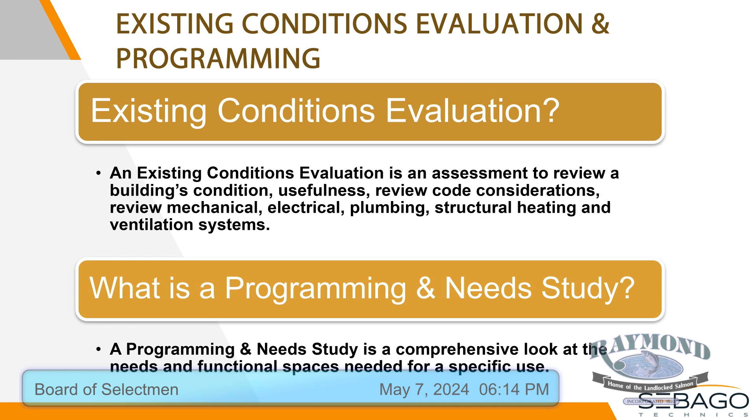Usually when we look at a public works building, we want to understand the condition of the existing facilities, if there's more than one, how they've been working, what operations they have. We also undertake a programming and needs study, that's where Mike Hays comes in, a comprehensive look at how public works functions and what the specific needs are. What we've found over the last several years looking at public works facilities is most are either spread out in different buildings or an older facility that hasn't kept pace with modern needs.

In some cases, I remember the South Portland facility, half of which was condemned, because public works tends to be the silent, unseen group that just takes care of snow and plowing and everything else, but they also tend to have some of the most expensive equipment. Sorry, Nathan, a new plow truck is $300,000 these days.

So we'll take a few minutes to go through where Nathan's facilities are distributed. One is located at 387 Webbs Mill Road, just down the street from us here. They have a portion of the building, about 4,200 square feet, with a footprint of about 3,900. There's a small mezzanine on the building. This location had a series of three additions over the years, in 1980, '82, and '89, correct?

I think I got that right. It's a masonry block building with a shingled roof. The parcel is about 7.8 acres, but it wraps up to Raymond Hill Road.

Years ago, we actually looked at a portion of that land on Raymond Hill Road for a town office location. So that's this site. When was that originally built?

The original building was built in 1980. The first addition was in 1982 for 2 bays, and then the latest addition was the other 2 bays in 1989.

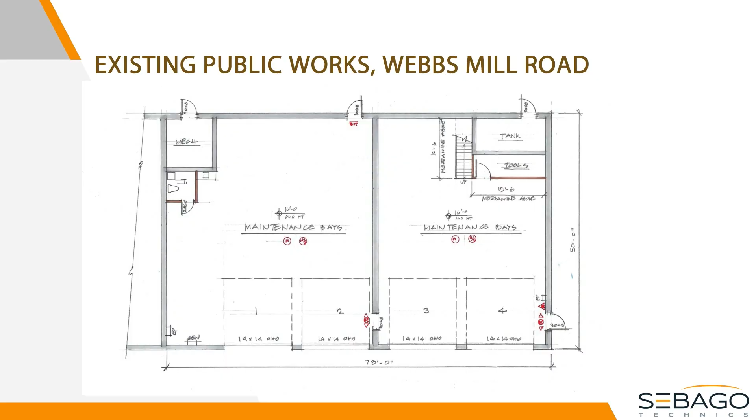This is just an as-built floor plan that Mike measured out in the facility. Pretty simple, basic layout with 1 bathroom, a mechanical room, and tank storage. I've got a few interior pictures here, and the next slide shows the interior.

Our mechanical, electrical, structural, plumbing engineer went through it. Mike went through it to look at it for a codes assessment. What I'll start by saying is the building is old enough that codes and design standards have changed over time.

The bathroom is not ADA compliant. The toilet's elevated and there's not enough turning space in it. There's no ventilation in the building per se, no air intake for supply air. The plumbing fixtures are all pretty well aged.

There is a good point that the domestic hot water heater's in good shape. You barely know, does that count, Nathan? We can keep that for you. We'll keep that as a memento.

Our structural engineer went through, and I think Sue had sent around the report, so I'm going to be careful when I say this. The building structure is in decent shape.

However, if you touch it, renovate it, modernize it, or expand on it, you'd have to bring it all up to current codes, which means basically that structure is probably not worth saving if you've got to bring it up to current codes.

My structural engineer loves to tell me the snow loads, the lateral loads, the earthquake loads, everything has progressed over time. Codes get better based on empirical information they collect over time. So this building just wouldn't sit with that.

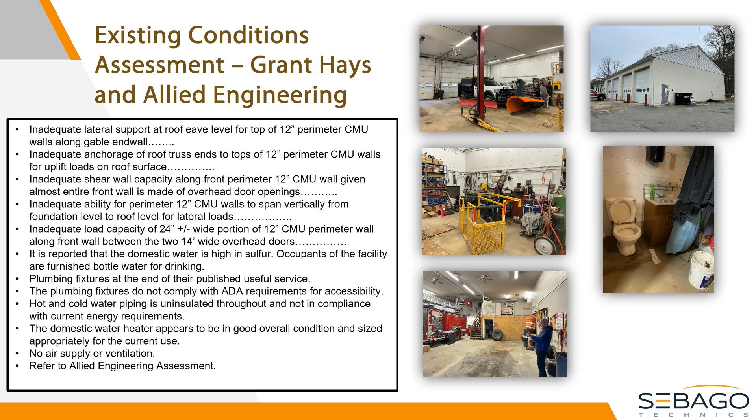The shingle roof is about 15 years old, but he did note, and I saw it too, there's a lot of fraying in the shingles, so I think they're pretty well at the end of their life expectancy.

The next location is off Plains Road. There are 2 buildings on that site already. One was a former sand and salt building that has been repurposed for cold storage and was reskinned. Great location for cold storage.

And then about 2015, we constructed a new sand and salt storage building. Those buildings have the laminated arch design, are in good shape, and are serving their needs.

Nathan acquired a portable trailer from the government in about 2018. For those who might remember when the military came in for about 2 years, they did what was called the IRT program, Innovative Readiness Training, and they did a bunch of work at Camp Hinds. Basically what happens is you provide the materials, they provide the labor and the equipment.

We got a tower out of it, right? Up there, which worked out great. And I still would not climb that thing. And I wouldn't go up in that lift.

And then they also refurbished a fire pond for us, and then down at the rescue building, they redid the detention pond, which needed to be renovated. So we got all that work, we just had to provide the materials out of it. It was a really good, valuable asset for the town.

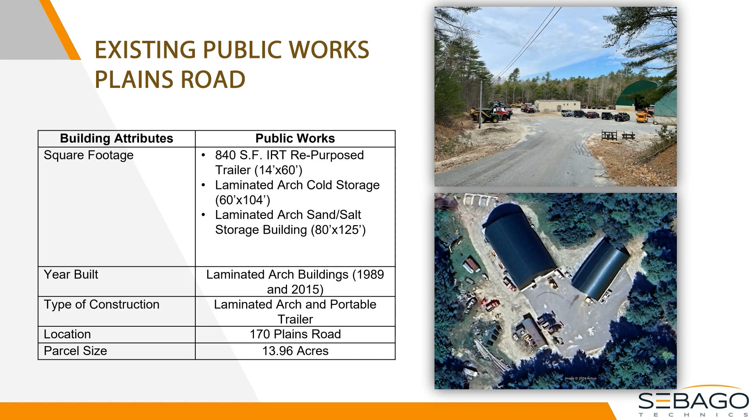Since they were here for that long, they brought in a couple of portable trailers for the rotation of the troops, the National Guard that came in and out. When they left, Nathan seized on an opportunity and obtained a portable trailer, which he moved to the site and has used as some basic crew space for his staff at the Plains Road site.

It does have heat, Nathan. Yes, good heat. And then we actually did have Allied go through it and Mike Hays go through it, as Mike indicated, just so we knew what we have. I'll be honest, this building was never intended to be anything permanent or long-term, but it's worked well as a stopgap measure for a while.

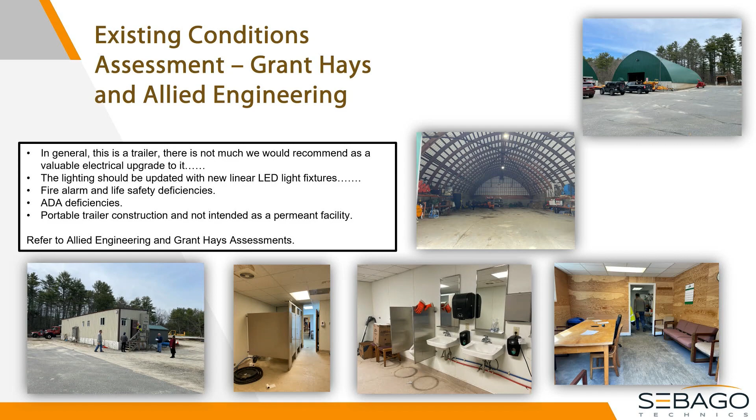The last of their facilities is really an old fire building. Dennis, you were in that probably at one point, right?

This is where I turn it over to Mike Hays, the architect. He's going to walk you through the programming and needs and talk about that, and then take you through some floor plans, building elevation, building styles. The building we're proposing is very fundamental and functional, very consistent with the other buildings we've been using in other communities. But Mike, I don't want to take your thunder. You keep telling me, I take it all away, so I'm going to give you a chance tonight.

Thanks, Owens. The first part of the process we embarked on is to determine what needs to go in a building and how big it is, what we call the programming and needs assessment. That's where we sit down with the folks who are going to utilize the building and find out what they need in it. So this particular programming assessment identifies 4 major areas of use.

The first one, at the top left, is the administrative functions, and those spaces include the Public Works Director's office, the administrative assistant, restroom, break room for the crew, custodial room, and locker rooms for both men and women that include bath facilities, plus some small amount of circulation to move about in those spaces. Through the sizing of those components, we came up with about 1,500 square feet of space needed to function efficiently and within code.

So if you want to go to the floor plan slide - I'm going to zoom in. I'm going to skip out of this and open up the PDF. Hopefully it'll be a little easier to read.

Can I ask you a question real quick while he's doing that? Sure. So what I'm hearing you say is, should they stay in the same building they currently have, any changes to it, because it changes the footprint, would all have to be brought up to date with everything, with the codes, everything. Should they hire a female mechanic, secretary, whatever, you have to have all that also brought into this too, correct? To be able to bring it up to standards and everything else. And right now it's not.

Right, let's pick on the trailer. Oh, exactly, exactly. Okay, totally ADA non-compliant. Yep, totally Universal Plumbing Code, MUBEC code non-compliant. And don't get me started on all the other pieces like the energy code and all those other things, because that trailer, if you were to try to touch it, that would be a problem.

Okay, and then - no, so saying all of this, and I know this is really pulling from left field on this one too - to bring everything up to make any kind of changes at all, especially roof, everything, what are you talking possibly money to do all this stuff? Because any changes at all to add on another bay, widen a bay, new bathroom, ADA, all of that, we're talking major money to bring stuff up to date, correct?

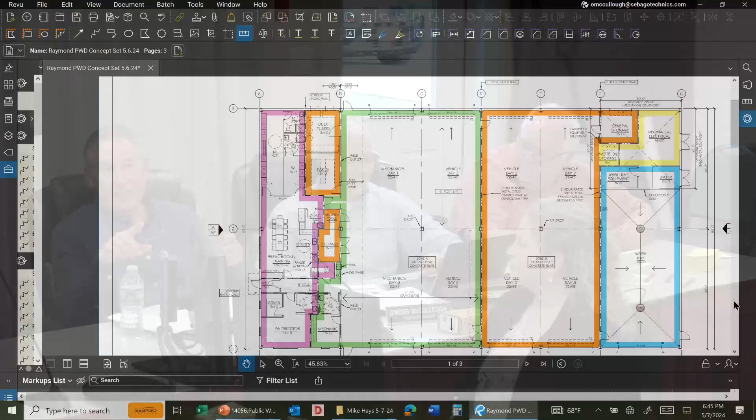And then we would have concrete up 4 feet off the floor, a kicker wall around the whole building. Some of the metal buildings you'll see out there run the structure all the way down and don't have the concrete wall. It doesn't work with where you've got vehicles and equipment moving around, so we have that wall on all of them. We'll wait for the elevations for that. The reason for that concrete kicker wall is because these guys plow right up to the edge of their building all the way around it, so if you've got metal, not a good idea.

Is there floor drains in the wash bay anyplace else, or just that? There are floor drains in the wash bay. There are trench drains in all of the work bays, and even in the staging bay there's trench drains. And then there are floor drains in any wet area, any of the restrooms, custodial, in the administrative area, and locker rooms.

So this is what we proposed the building would look like. I'm gonna grab a little water here. Can you talk about where it's going to be sited on the lot? I have a whole slide for that, Joe, coming up. Can't wait. I knew you could ask that. So, so if we look at the... So hurry up, we want to get to my stuff.

Okay, so if we look at the top elevation, this would be what would be considered the front side, facing the rest of the operations, and you'll see it on the site plan. The left-hand side is the administrative portion, which we've kept low because we don't need high bay there, to save some money. On the right are all the work bays that you see. You'll see that horizontal line about 4 feet off the bottom of the drawing—that's our kicker wall that goes all the way around the base. Above that are insulated metal panels for the walls and insulated metal panels for the roof. Over any opening, we have 2 rows of ice and snow guards to keep stuff from falling on people and vehicles.

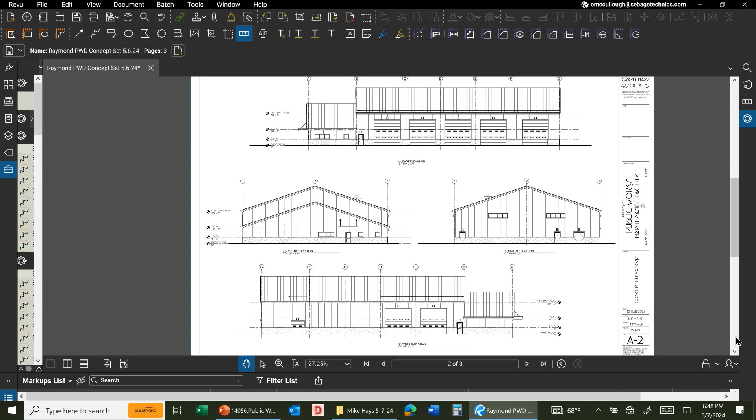The 2 middle elevations are the ends. The one on the left is the primary entrance, because you can see a little canopy over the door there. The one on the right is the wash bay end—we've got a couple of windows up there to dump some light into the wash bay. There's an egress door on the left, and doors on the right of the mechanical room and another egress door. The bottom drawing is what we would consider the back of the building, with the 2 drive-through bays shown there with the overhead doors. The people door to the right is that safety alley, that safety aisle. On the left, there's a small overhead door that goes into the general storage room, so if a pickup truck needs to move small stuff in and out, there's a small 8x8 overhead door for that.

In 3D, this is what it would look like, with this concrete bottom, gray metal panels for the walls, green for the roof, and the overhead doors are typically white by standard color. You can get other colors, but they cost more, so nobody wants them anyway—well, I shouldn't put it that way. There are certain people that like red doors, which we've done a lot of for fire stations.

Sorry, I got to get back to the PowerPoint. So that's the building. Yes. Yeah, where is the people? Can you please go to the mic? They can't hear you on TV.

John Fasella, Raymond Fire Department, 19 Loon Lodge Road, Raymond.

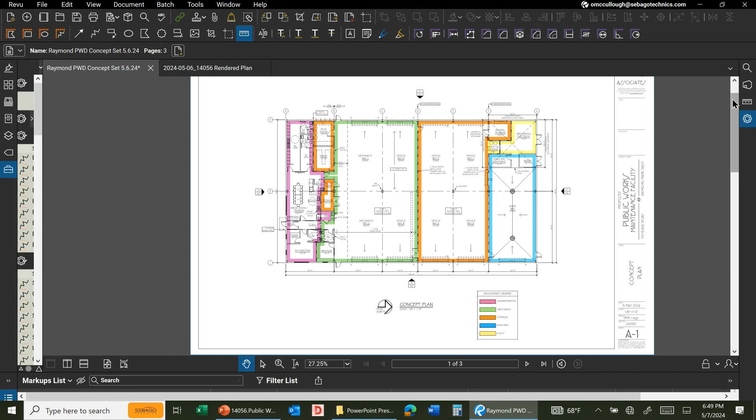Where is the people door on the rear of the building? I didn't quite get that. So if you go back to the floor plan and put the cursor on that, which particular one are you looking for, John? I'm just wondering how people would access the back of the building besides using a bay door.

On the left side we've got the two doors down there. And then on the right side, on the right end elevation, all the way to the end, there's one door there, and that door actually connects all the way through to the middle wall. So you've got a remote point of egress there, and another remote point of egress, with connectivity from the bays to the wash bay. And then you've also got the main entrance, which is the third point of egress. So we've basically got three points of egress out of the facility.

So from three sides, you can either access the building or people can egress from the building? Exactly. Okay, thank you.

Don't you have four egresses? Yeah, down there's at the bottom, one, two, three, one in the back - there is four. There is one down at the mechanic area. So the safety aisle has two egresses, and then you've got the main entrance and the wash bay. So you're right, you've got four.

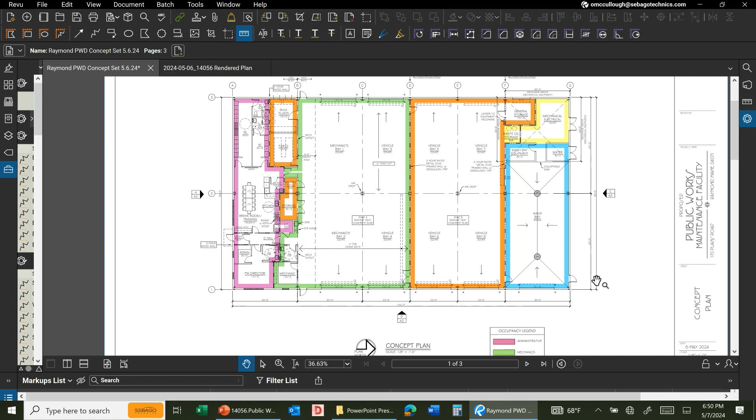Thank you. Yeah, thanks. All right, you're on.

One thing to note, when we put this out, the design will require that the roof structure be designed to accommodate solar. We're not proposing to install solar, but it's a real inexpensive lift to require the structure to accommodate it. And then the electrical would be required to have enough capacity in the panel to accommodate solar if we did that. How is this building facing?

I'll show you that, I already asked that. All right, you guys win. I'm going to the site plan. So here's the orientation of the building, so the sand and salt sheds here. If you ask it twice, they do - I gotta ask him twice to get an answer from him, right?

Thanks a lot. So you notice the trailer is going - well, that's because the trailer's where the building's going to be. So the trailer sits about right in here. This is the access down into the site, there's that loop road if you've been down inside of it. So basically where the trailer is is where we're going to place the building. We'll provide 360 access all the way around the building. There's about 35 feet, maybe it's 40 - we moved it a little bit. So we provided a pretty good space between the sand and salt shed and the building, providing access all the way around the building.

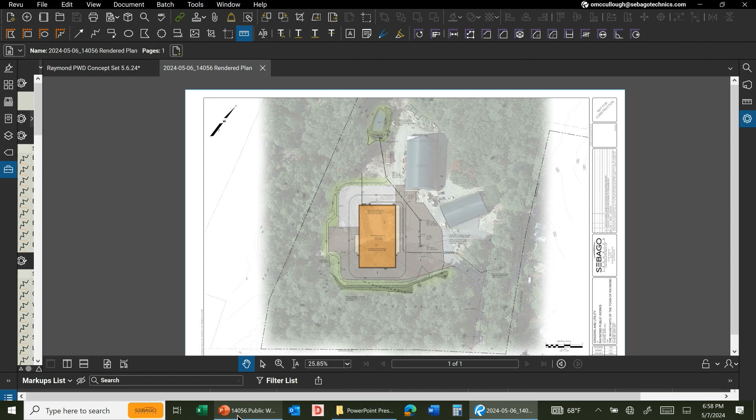Now I'll go back to the PowerPoint. We should pick up from the current slide.

Okay. Mike, we're done with you. We talked about the elevations. I have another planning board meeting I'm supposed to be at, so I'm just making sure I cover everything before I have to book out of here.

When you're ready to go, you can leave. We'll talk about you behind your back. Perfect, we'll say all good things. Great presentation, can I ask if there's any questions?

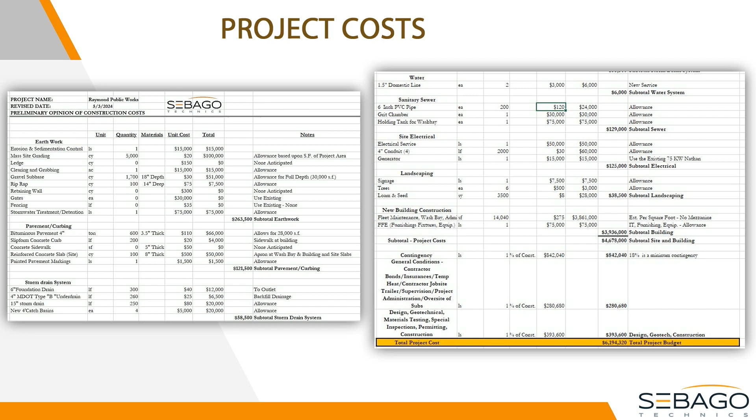Absolutely, at this point, of course. Before I have to go, I think I'm good. You don't want me to talk about architecture. That's never... he's got to live with whatever I say.

Thank you for the opportunity to speak to you and present. I appreciate that, thanks for coming up. I am curious, it's quite a span.

Dennis Morse, 340 Cape Road. Truss roof? It's a pre-engineered metal building. So the building is actually beams and columns as opposed to trusses. The metal? So yes, it's metal, all steel structure.

I always get stuck talking about cost, so thanks. And Mike's leaving, he's got one. Thank you very much. It's a little hard to have a question. We got one more. Oh, I got some questions, so I'll just get them done. Sounds like an engineer.

David Brown, 91 Tenny Hill Road, and I happen to be a mechanical engineer. I work in the same kind of industry these folks do. So I had a few questions particularly about sprinklers, and the sprinklers versus the 2-hour firewalls.

And I went on our website, and right now we have a supplemental annual town meeting warrant, Article 36, which would be to amend the town's Fire Protection Ordinance, and it has a date on it that says given under our hands on the 7th day of May, AD 2024. And so knowing that that's out there...